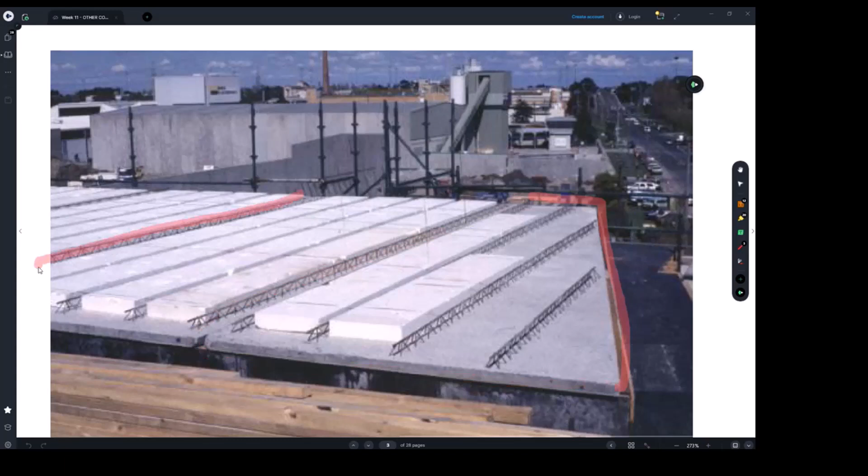Now, can someone tell me which system we had before over the past weeks that is kind of similar to what we're talking about here? Any thoughts? Excellent, yes - hollow core. Hollow core was kind of the same thing, but with hollow core, the reinforcement was fully inside the hollow core units, which come from the factory.

And then we had just the top screed - about 100 mil or 80 mil screed on top of the hollow core slabs. As I said, that screed on top is also structural because it's got a mesh, it's got some steel we put in. So hollow core was a combined flooring system in terms of construction on site and precast.

Now, one of the key advantages is you don't need propping, you don't need any formwork below, because you have ready-to-construct floors below the slab. So as soon as you put the precast part on top, other tradies can actually go under and start doing whatever they have to do - services, whatever other construction requirements. That's the key advantage - it's fast, it saves time, and it can go up to specific spans. So that's the first system.

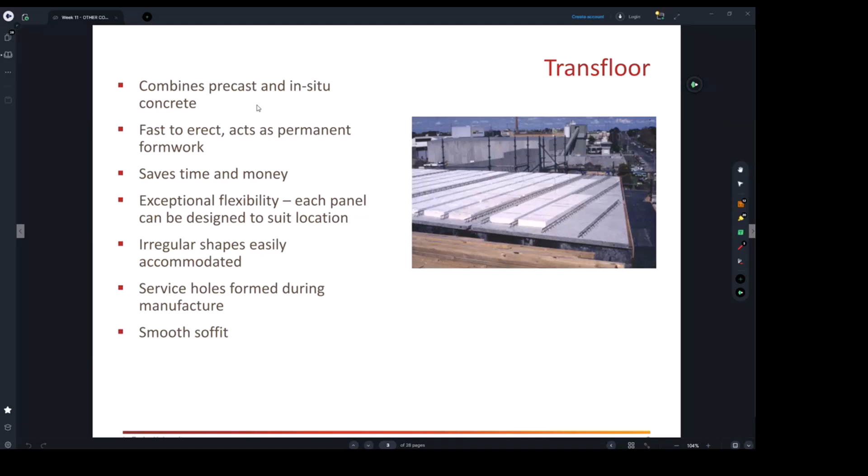As it says here at the very start, this is combined precast and in-situ concrete, fast to erect, and it acts as permanent formwork. That's the key point. You need to know that system, know the key advantages, and compare it with other systems we've been talking about. I'm sure you know about hollow core as well.

It saves time and money - this is talking about the same thing. If you save time, it's fast to erect. There is flexibility in construction, but the design engineer will, as you can see here, form the precast section to the shapes required. It does not always need to be rectangular shapes.

If you remember the hollow cores, they come in strips, like what you did in assignment 2, and what I've seen some groups doing - well done. When you put the hollow cores, they come in about 1.2 meter, 1.5 meter strips. If you had a void inside your building, you have to put supporting beams around the void. Now with this transfloor, the voids can be allowed for in the factory - you don't need to worry about it. So it's got flexibility in construction.

Yes, we can construct irregular shapes easily, because you can see here we've got this semi-triangular shape, semi-rectangular shape. Services holes can be formed during manufacturing. It's unlike precast hollow cores, where when you construct them, you have to frame up the trimmer beams.

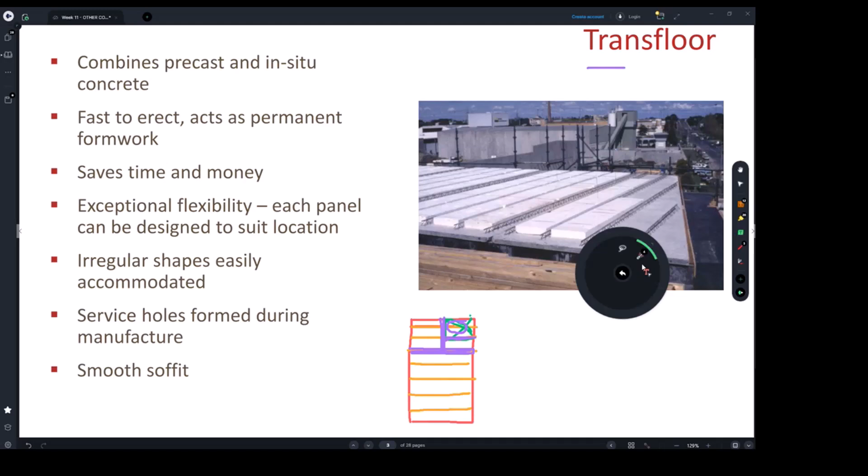Just going back to where - yeah, here we go. For the soffit it will be really smooth. So as we know, the soffit, the lower side of the slab, from underneath of the slab, it's typically really smooth. And hollow core will be quite rough. So that's something the architect needs to allow for.

Also in construction, you've got to know if it's hollow core, we're going to need to put plastering at the ceiling level for the floor below to hide such things. But the transfloor, it's going to be smooth - it's kind of ready for service. It may just need to be painted and all good.

In terms of its construction elements, now you can see this kind of truss system, right? The triangular lattice truss system. It is the key reinforcement element inside it. It's already embedded and placed into the transfloors while it's built in the factory, and it will come like this to the site. So the key reinforcement element for those systems are the truss systems.

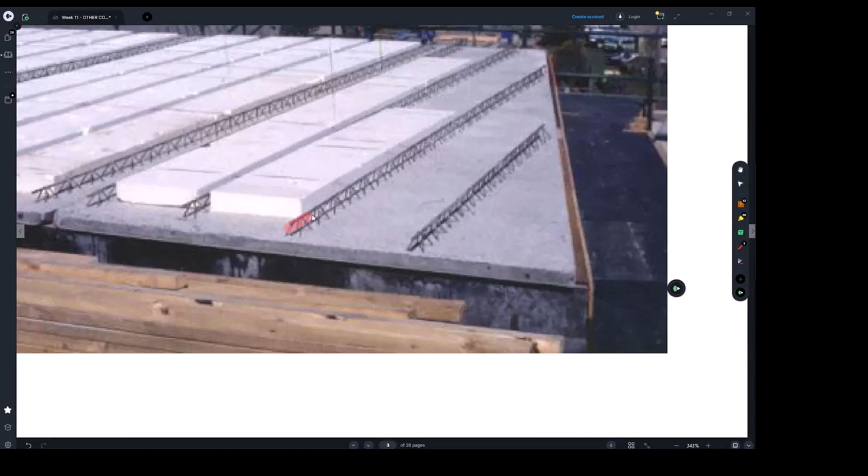The triangular girder truss systems are built, and the size of the bars - these are the diagonals within the triangular truss system - will typically be sized by the engineers, whether N16 bars or 20 or 12. They will be pre-placed in the factory within the precast section, as also shown to you here. You can see these are the truss girders, partially constructed inside this 200 millimeter thick slab, or more or less depending on the design.

So the first elements we have here are the reinforcement. There are also other secondary reinforcements running this way to cope with shrinkage and the small spans. The way these slabs really work, the main girders supporting the span are these strips where the trusses form part of the strip. Then in between, the slab runs between the two strips, with reinforcement within the slab, as we're going to see in the next details as well.

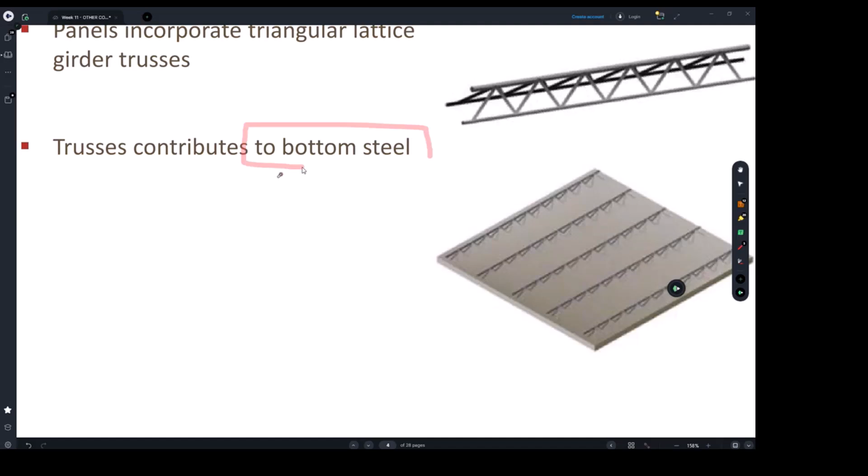So these bottom bars of the truss - as you can see, there's one bar at the top and two bottom bars. They're going to act as the bottom steel for the slab, for the transfloor slab.

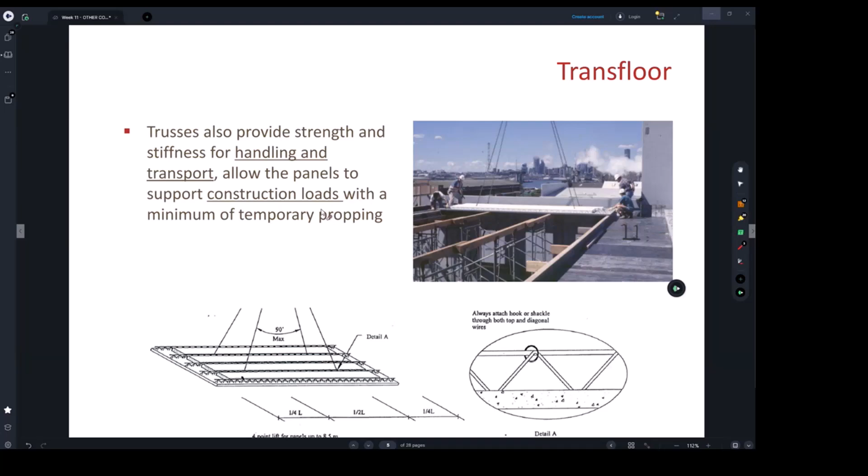Remember there is also a bar submerged inside the concrete already, like this. So as you lift up or crane up the transfloor slabs, the truss will be taking away the load from the concrete. So the truss has a temporary function, which is to carry the precast slab.

So the actions will be kind of different. While you carry the transfloors, the truss will be under negative bending action, which will be transferred to forces inside the trusses. Then the permanent positioning of the transfloors will end up imposing positive bending. So if you lift this truss, the bending moment diagram will look something like this, but things will be different when you actually place the transfloors in their permanent location.

Now someone looking at this will say, but we do have propping lines. You can see there are propping lines here. That's correct. That's something similar to the Bondek - remember the Bondek sheets, they can be without props, with one line of prop, with two lines of props. Same thing with transfloors.

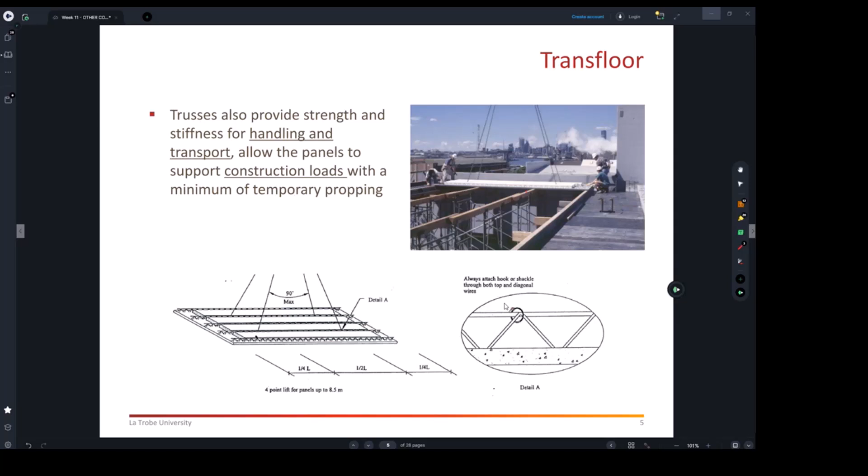So basically from the slides, we can understand that the triangular trusses we have in the system act as a framing component to support and crane the precast sections of the Transfloors. Once it's in the final position, they work with the slab to resist the permanent loads. Now this is not the final - you're going to see next what we do after you place them.

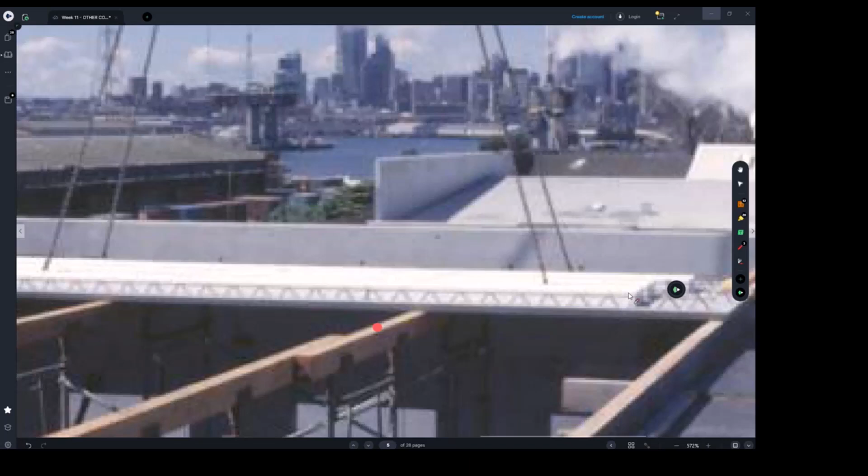After they place the transfloors, sometimes you see those white parts - they are foams, polystyrene foams. They're going to create voids within the final slab. In the next slides, here we go, the green shaded area - it is a void. That's where you see the white polystyrene foam. It is there to create a void.

What was the reason? Can someone suggest why you think we're putting the polystyrene foam in? What's the main purpose for that, you would say? Why do we have polystyrene foam in there? Someone suggests acting as a suspension.

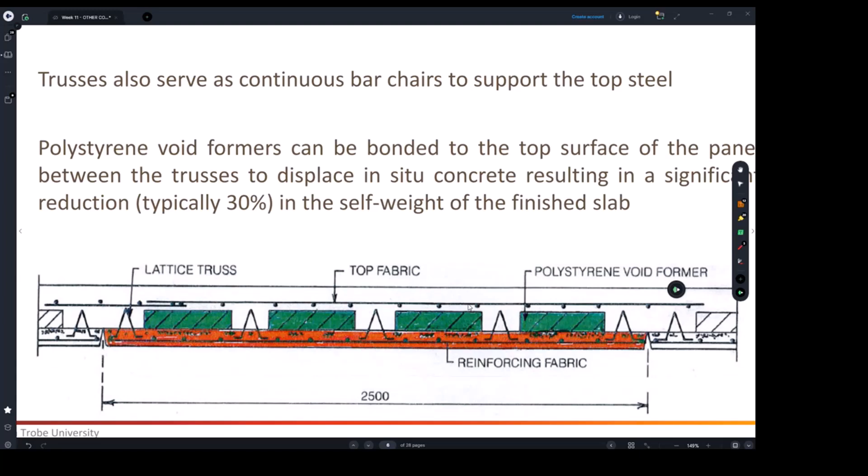So you can see the cross section of the transfloor, it's what we're seeing here. This is the full thickness of the slab - this is the full, final thickness. Now the precast section is basically going to be this lower part. Let me clarify this: the 2.5 meters is the width of one transfloor panel.

So you remember what was the case for the metal sheet decking in the composite slab last week? How wide was the section to put in one go?

You remember that number, that width? What was the width for that? 590 mm. Say that again. 590 mm. Yes, so about 600 millimeter width.

Today, the width of the Transfloor can be up to 2.5 meters. Now, the red color is the precast section, which will come to us from the factory. And on top of it, we're going to have this triangular lattice submerged.

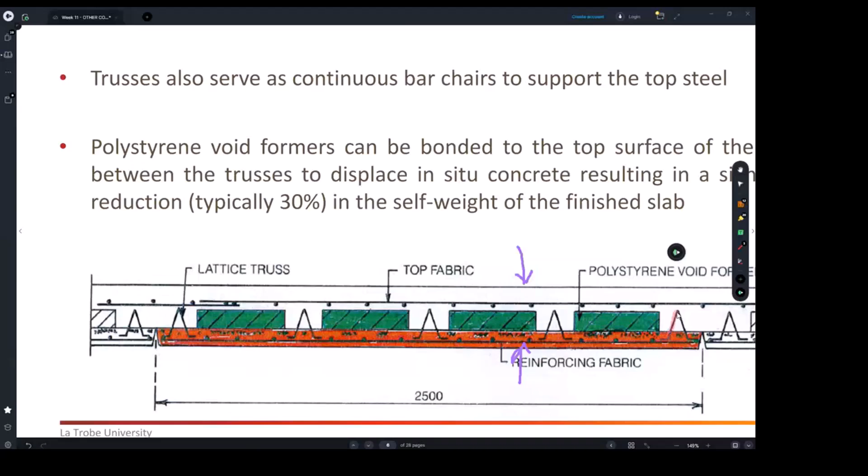Within the precast section, there is a mesh. A mesh of steel, you can see the steel running in this direction, and also the steel running out of the page. So it's like a mesh, which I showed you several times before. You can see the lattice trusses are also partially submerged.

Excellent, yeah, that's right - to reduce the weight of the slab and the steel quantity. So basically it is the weight. We're creating voids. It's something similar to the hollow core.

Hollow core, they've got circular kind of voids. Why are we doing this? We're doing it to reduce the dead weight. The dead weight is usually the heaviest component in the structure.

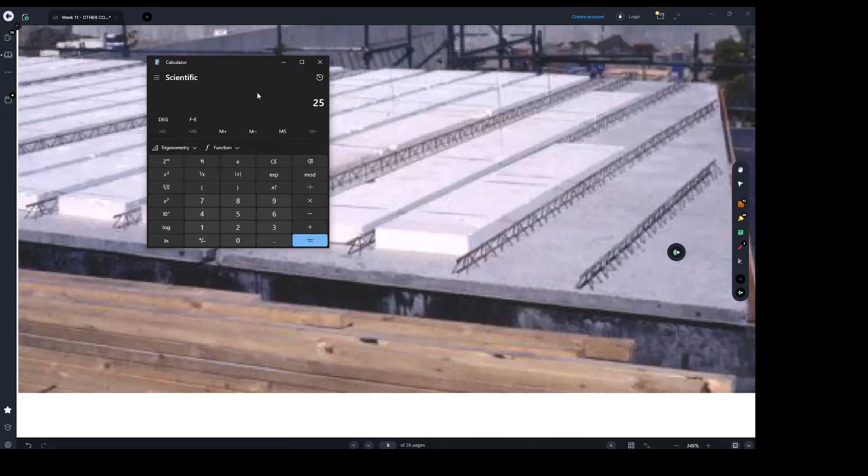The density of concrete is 25 kilonewton per meter cube. So 25 kilonewton multiplied by, say, a 200 thick solid slab, multiply by 0.2 in meters, gives us 5 kPa. 5 kPa is actually 500 kilograms per meter square. That's just coming from dead weight.

Now imagine that usually the residential load on a slab is only 1.5 kPa, or 150 kilograms per meter square. And you can see the 200 thick slab can span only 5 meters or 4.5 meters by its own.

It's 500 kilograms. That's why engineers and construction ideas always come up with systems that allow you to go for larger spans. You saw your hollow core for your assignment went up to 14 or 12 meters or even more. If you want to use solid concrete, you're going to have 300 thick, but remember, there is a lot of dead weight there.

So you can see there's always polystyrene suggested in different ways that will basically help you create voids, and voids eventually reduce the dead weight of your slab. Right, so let's go back to our section and take it further. That's the section I was talking about here.

The colored parts, which is the red part here, as well as the void, as well as the trusses which are submerged or embedded into your precast section, they will be craned on site. Then later on, when everything is positioned, the top bars will be placed.

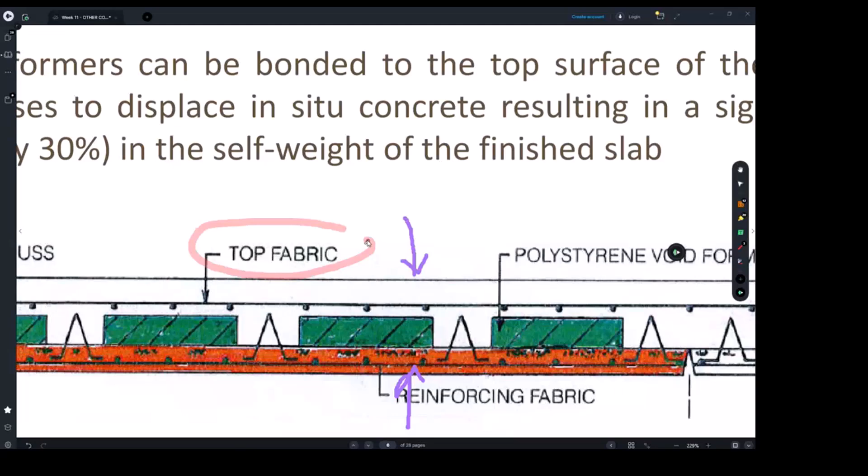So this is another mesh, which is to do with the top bar. Then you're going to hear we're lapping the mesh. We have to lap it. In the engineering drawings it tells you how much lap we need between two sections. And then you will be pouring this whole slab all together.

Now, how thick is the slab? It varies depending on the span. It's like hollow core - hollow core can start with about 250 thick hollow core slab, and it can end with 400 thick concrete slab, depending on the span and the load it wants to take.

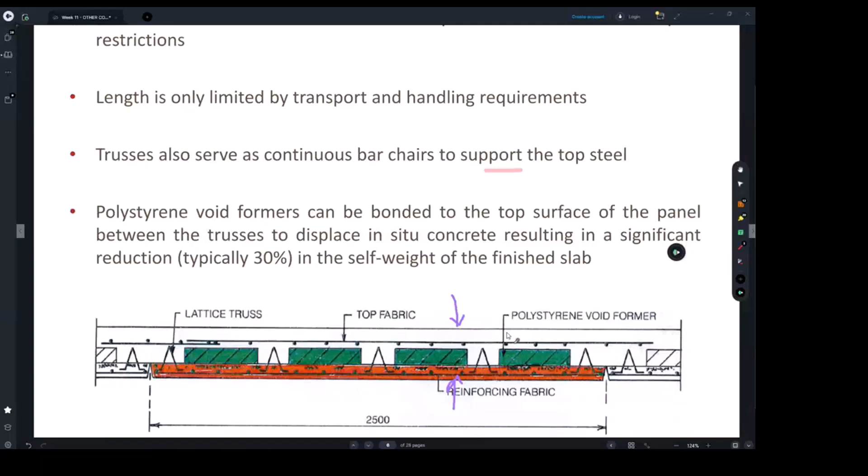Same thing, I go through the same thing. So there are some details good to know about. You see the trusses will also serve as chairs to support the mesh. Usually these lattice bars or triangular truss bars can also support as chairs for the top reinforcement.

So the length and the size of the Transfloor is also a function of transportation. Generally, 12-meter trucks can be ordered reasonably with adequate economic measures, but if you want to go longer, cost will be high.

This is the standard width, as I said. The standard width of the Transfloor is 2.5 meters, limited by normal transport restrictions. Otherwise, you can go with a widened vehicle, but that needs more arrangement. Sometimes when you drive, you see two cars moving alongside a truck because it's wider than this. So it depends on where you're building it.

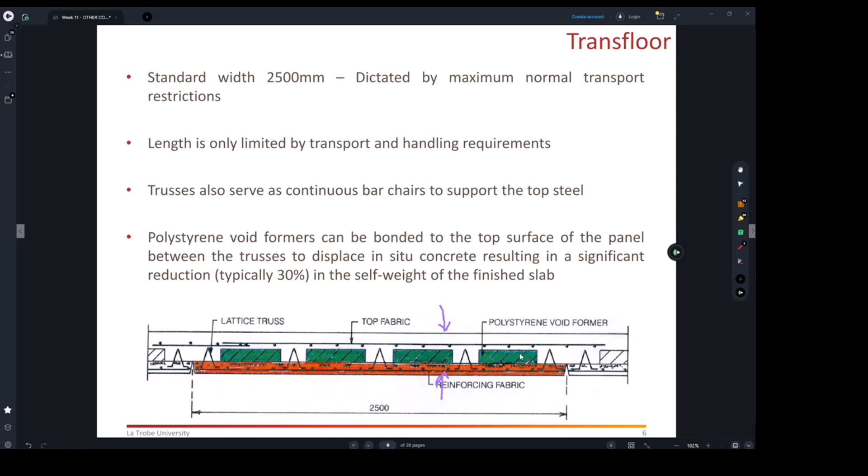We talked about the polystyrene void formers, which typically can take away 30% of the dead weight. So imagine if this was a 400 thick slab overall and you did not allow for the polystyrene, the dead load will be increased by 30% if you did not allow for a polystyrene to be there. And nobody will do that.

This is just another section from the suppliers. So basically what you need to know from these notes is the system, and all these kinds of features. These are the questions we like to ask you, the features - they are all what I've discussed with you. The components - I think all of you will know the components.

You've got the precast section with its own reinforcement, the trusses, the triangular girder trusses, the polystyrene, and then the in-situ component, which is poured on top of the precast section. So as you study these things, always think about the components of the system and the considerations you need - one of them is whether you need a single propping line, no propping line, or multiple propping lines.

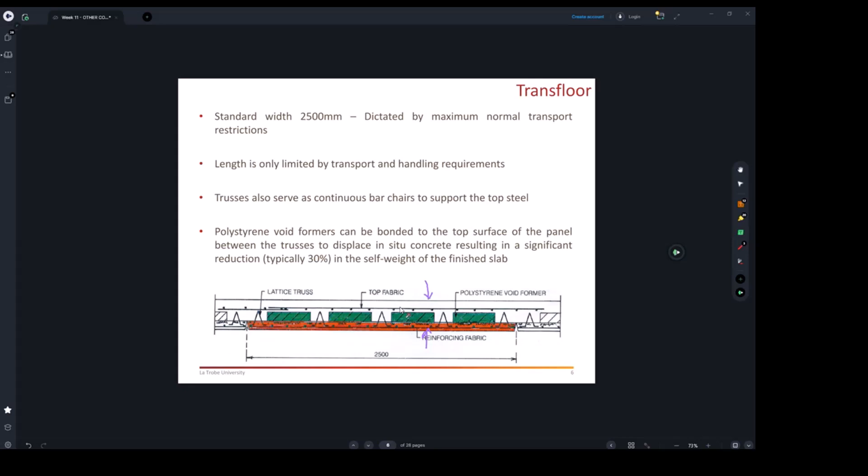These three systems we're covering today, read them alongside the other systems we talked about, like composite systems, the post-tension systems, and the pre-stress systems - we had a couple of pre-stress systems. They kind of talk about the same features and the same ideas. So my point is, when you start reading for this topic, try to read it alongside the other topics. Don't read them separately.

This is again from the supplier, from one of the suppliers who manufacture, erect and construct. Nobody knows - maybe one of you is going to be managing the construction of an entire building, or you will be working for a manufacturer for one of those elements. Nobody knows what you're going to be doing, so they show you how you can connect this transfloor system.

The transfloor system I'm talking to you about this week is here. They show you how this can be forming a slab - see here, they are forming a slab, which we've seen. And here as well, it is forming a band beam. So you can use this system to actually build a band beam and to build a slab.

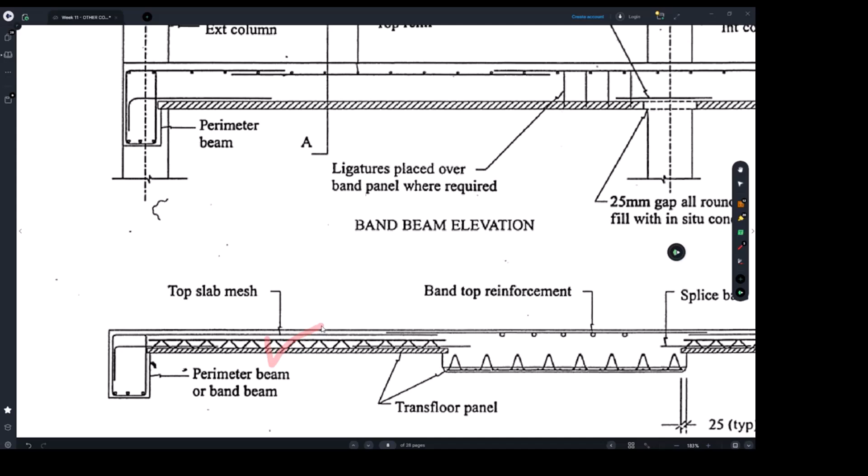But with the band beam here, we are cutting across the band beam, and here we are cutting on the longitudinal direction of the band beam, right? And there are some basic reinforcement detailing - there are going to be some special bars lapped between the transfloor slab and the other supporting elements.

Okay, same technique - these can be built together. You can see here, this is a picture just showing the band beam preparation, and this side is the slab, right? So it depends. I can see that the band beam here is just a solid band beam, because this is just the formwork - so this is just the band beam without the transfloor, and the transfloor will be supported on the band beam.

But the band beams as well, if possible, can be done by using the transfloor as per this image here. The suggestion by the manufacturer is that this band beam, if you want, you can build it with the transfloor system. This side here just shows you an edge beam, which is the concrete edge beam.

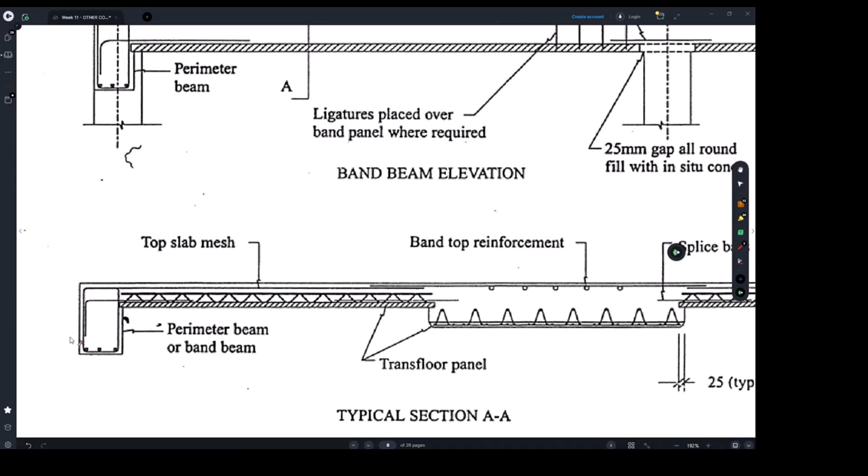So they can build it - they can pour all the concrete in one go, you just need to prepare all the reinforcement. Here you're going to have the formwork, the boxing out for the beam, and everything will be propped adequately. So what I'm showing you is how you prepare the formwork for a concrete beam - this formwork will be solid enough to support your transfloor. Remember that the transfloor will have its own propping lines as required.

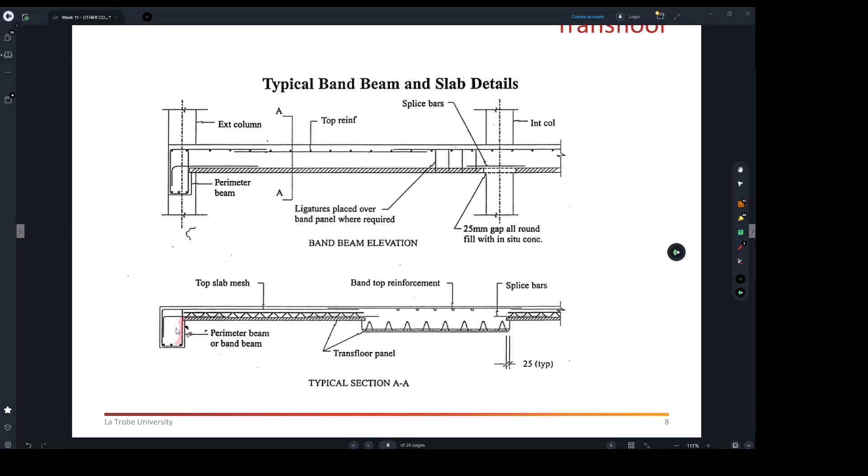Same thing for the band beam - it can either be formed as a solid band beam, or you may think about using the transfloor if it's adequate to do such a job, and then you may need a propping line. Then you can pour the concrete all together on top of the precast section, and it's also going to be poured for the beam as well.

So this one, can someone tell me what they expect, what they're seeing here, the connection between which structural element? This is what we all know, that this is just the transfloor slabs. Can someone tell me what they're allowing for here?

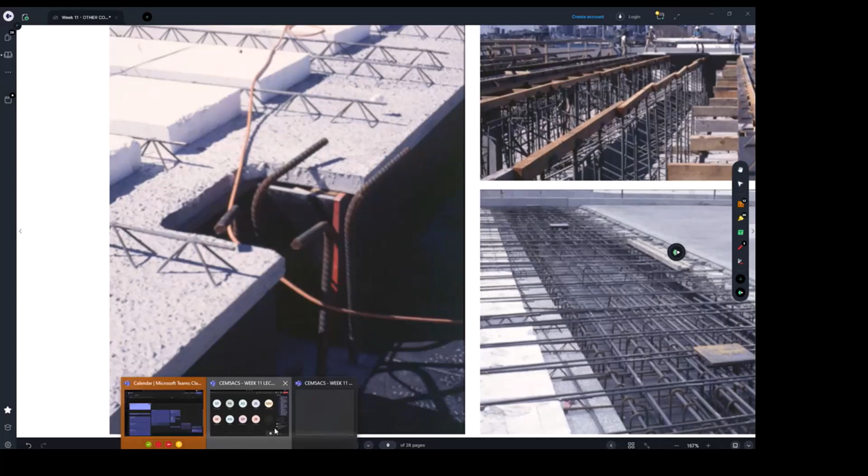There is a beam here. You can see there is a room. That's where they're going to be pouring concrete, as they call the upper part of the slab, the in-situ section of the transfloor system. They're going to be filling as well the beam, and obviously the column part will be poured as well. And it looks to me that this is actually the final floor level, because you can see the bars are cogged, they're not continued upwards.

Right. So let's talk to that. This may be again a picture you see in a final exam and tell you, can you please annotate the structural components that you are seeing in this image? That's basically part of a question you may see.

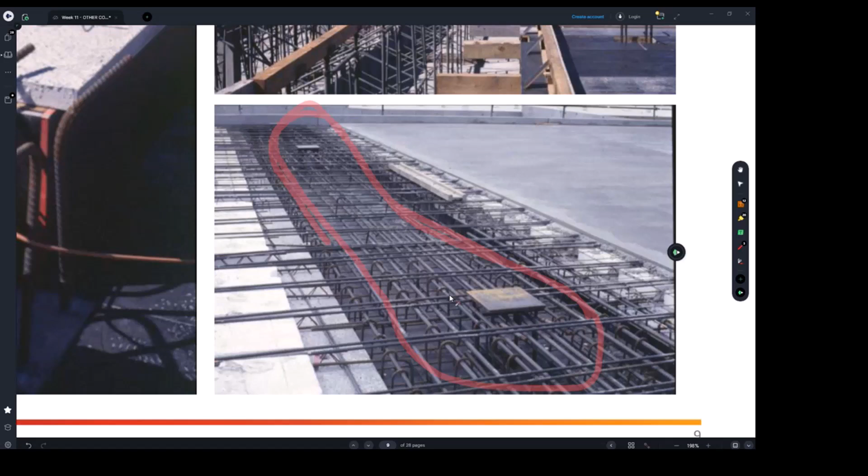So can someone tell me what's this I'm going over? What's this? Band beam. This is a band beam. That's right, and it is basically an in situ band beam, right? And we studied this, and I expect students to know it. What was this system here?

So in general, this is basically, remember, as we always do with you, we're going to be really specific in the questions. We tell you list, for example, 5 components. So band beam is number 1. Now someone can come here and say, what's this I'm highlighting here? It's the transfloor system we talked about today. That's the transfloor system, which is supported on the band beam.

That's another component. Then you can talk about the elements of your transfloor system. This is a polystyrene formwork with the voids. This is the polystyrene elements. Yeah. And what's this here?

What was this part? The truss. The Lattice. Triangular lattice truss. That's right.

Okay. Now, whatever we covered for you, we will expect you to answer. There are things I will talk to you about, but we don't. We won't, maybe if this element was not something we studied, we focused on during our week, you won't be, I won't be waiting for the students to answer.

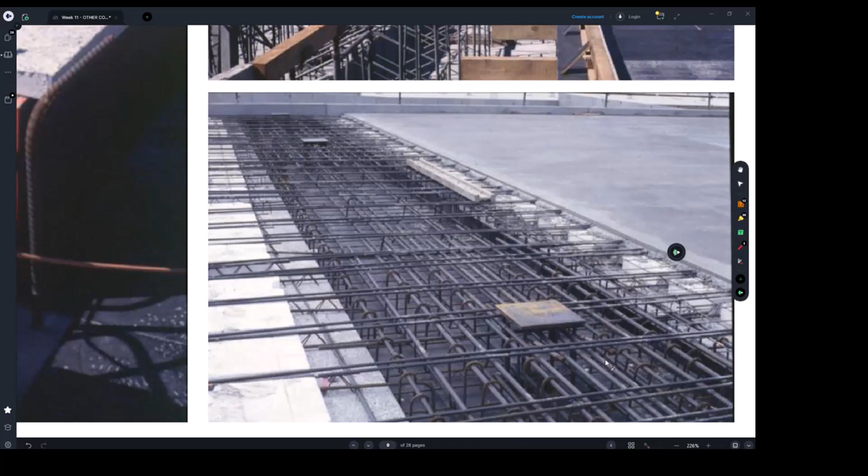For example, someone is they may ask me, what's this? Can someone suggest what's actually this? It is something you studied, but you did not directly study. It was for something else. But anyway, I don't expect students in a final exam, all of them to answer this, so there will be no,

that's why if there are effectively 6 elements in this image, I would expect students to answer 4. But if students answered it, that will be clear for them. So I just want to see how students' knowledge is at. Anyone knows what they think? What's this actually?

Yes, yeah, plates. Yeah, they are the cast-in plates. You remember what we studied in the precast panels? We have the cast-in plates with U-bars in the back. That's same. But here they wanted it, maybe they're gonna weld, this may be the last floor, and they wanted to weld the column on top for a canopy or whatever.

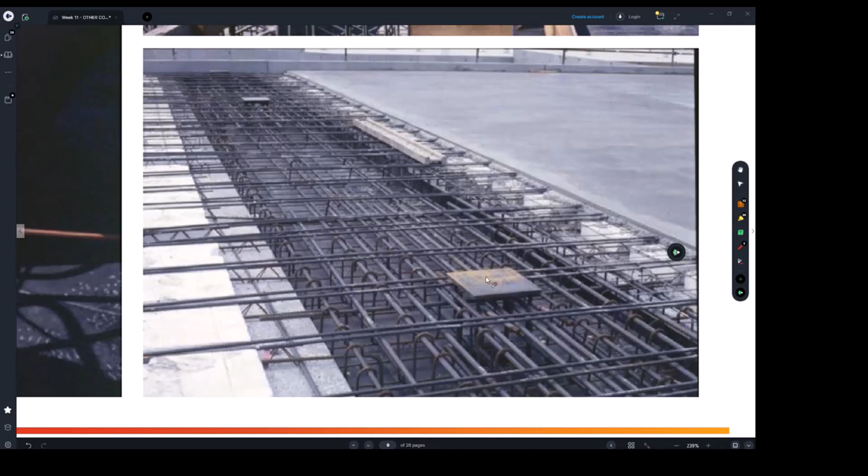You know, like what you see in a car parks or something. So maybe they're gonna be having a column. After they pour everything, they're gonna have a piece of column and then they're gonna weld it on this plate. So this is simply, it's a precast panel, something similar to what we used, and what you're gonna need to work, what you're gonna need to show me this week.

Again, I think people will need some support with their last question, the precast panels. I will talk about next week how you're gonna be examined about it. And there are some groups, they showed me what they're doing, but they didn't show me enough about the last question.

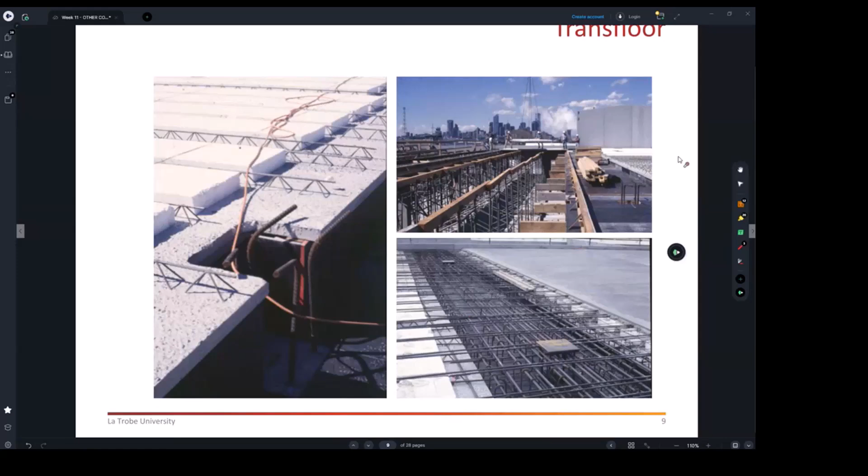So basically here what we're seeing is just the formwork which I showed you. This should be very solid formwork, because it really needs to be solid enough, since it's going to be carrying the edge of the Transfloor slabs. Remember, the Transfloor slabs have two lines of supports here, and they're going to be supporting the Transfloor slabs.

Any questions you would like me to answer, or any detail you see? If you're going to be asked about something, you'll be asked from images similar to this, and we just want you to tell us, yes, I know this system. That's the credit we want you to have from the subject.

So that's one type of slab, the Transfloor slab. We're done with it. Ultra floor - it is basically something which consists of things we studied before.

So this is another flooring system locally used. You may end up in a company which doesn't use these types, but however, if your company is involved in renovating an existing building or adjusting it, most of the buildings you see in the city are built with this system.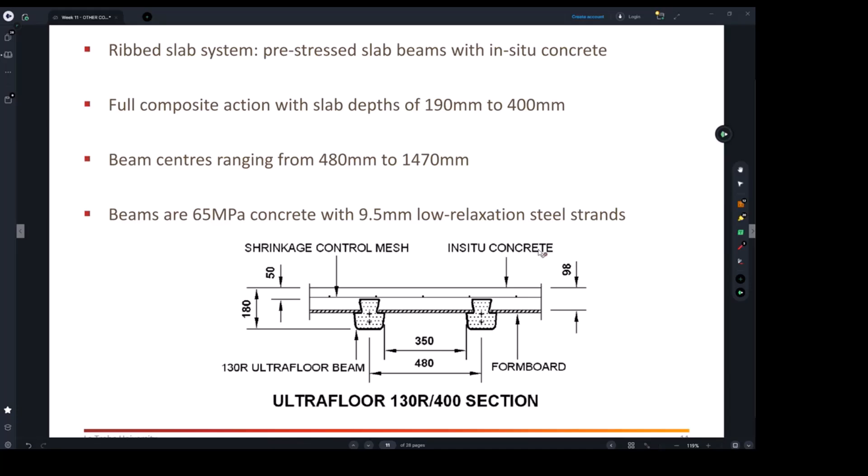So it's still possible you may end up searching for such a system and need to know how it works. Basically, Ultrafloor is another system which is, as we said, pre-stressed beams with in situ concrete. So it's kind of a combined construction type, and it's a ribbed slab system, because they have these kind of elements.

If you're going to start making renovation works on existing buildings, like what they did about 8 years ago for the central station in the CBD next to RMIT University - they had a lot of upgrades there, and the existing floor was all the ribbed floor system. So to work with such systems, you have to know how they are framed in order to adjust them.

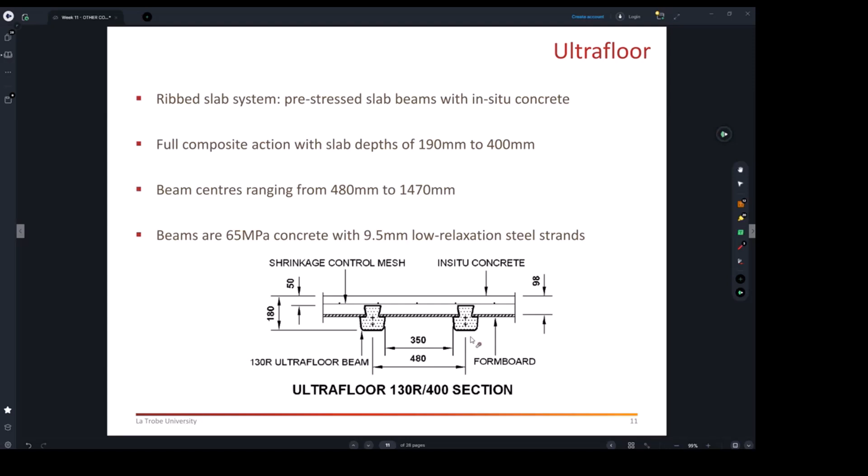So back to the system, part of it, this composite, is precast. This precast element is actually pre-stressed. That's why it can take much larger spans, and most likely you need zero propping systems here, because imagine you have precast, pre-stressed elements with good high capacity, higher than the transfloor slabs. It is a ribbed floor system, ribbed because you're always going to see these kind of ribs from the soffit side or from below the slab. These ribbed beams are pre-stressed, and we all know what pre-stressed is, we talked about this a few weeks ago.

Then there are special sheets. They can be lightweight if the ribs are very close to each other, only about 0.5 meter apart. So in between them, you can use very lightweight material, not steel - it can be plyboard or any product that can temporarily sustain or permanently prop the concrete, but we're not using it as part of the structural system. It's just to support the wet concrete until it gets hard.

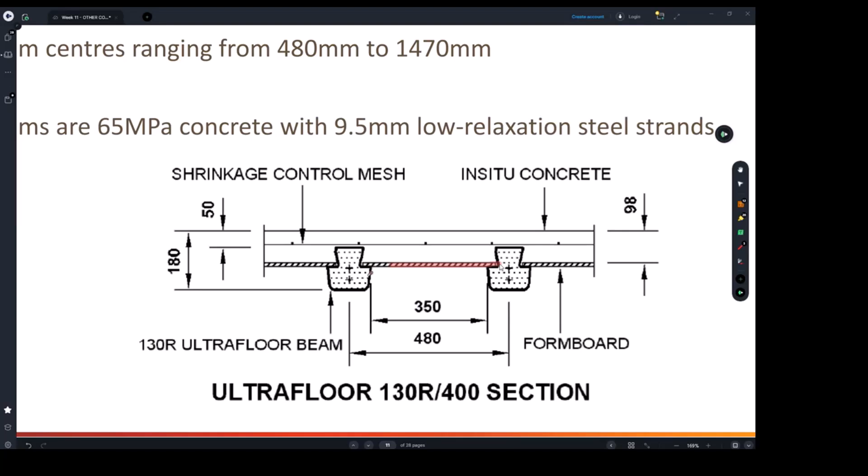The other advantage of these sheets is it's actually more useful to have it cementitious or plaster-based material, because it can help you with the fire rating and fire resistance. That's one of the key advantages - you need something to fire rate the slab. So if you use metal sheets, you get less fire resistance.

But the metal sheets have capacity to go for longer spans. If you want this to be a meter or 1.2 meters, as we're going to see next, you will end up having a metal sheet, something similar to what we talked about in the composite slabs last week. The key advantage here is for the slab to be really thin - about 100 mil thick slab. And the overall depth with the ribbing of the pre-stressed precast beams is going to be 180 thick.

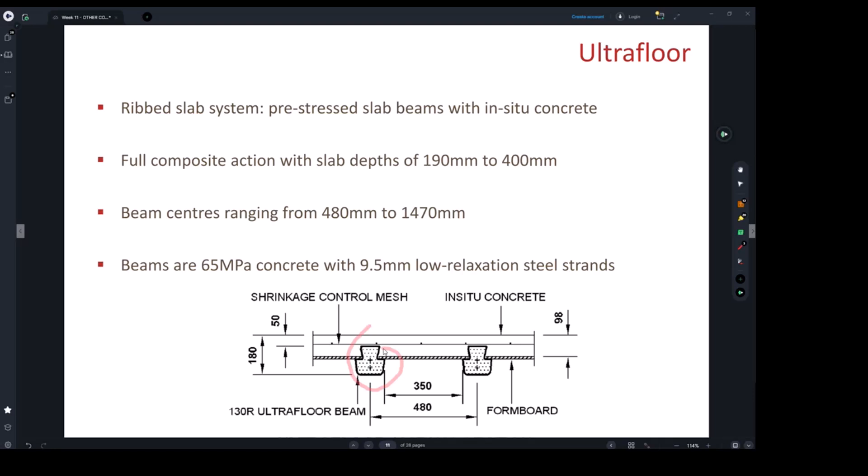There are different sizes by the suppliers, different thicknesses. It depends on the load - if you want to carry an office building, it's different than a shopping center, and that's different than residential. Beam centers - we're talking about the ribs - range from 0.48, which is the case here, up to 1.5 meters. Once we go to such long spans, we'll end up using heavy duty sheets, which can be metal or steel.

So the pre-stressed beams are quite strong, 65 MPa concrete with 9.5 low relaxation steel strands. This is special steel strand, smaller than the 12.7 we used before, which you have documented and are working on in your second assignment. You're all going to need to show me nicely, adequately drafted floor plans for your precast slabs and floors in assessment 2. I'd expect most of you have already used the 12.7 strands - this one has smaller strands, the 9.5 diameter, but it's only needed for these special type of rib beams.

As I said, they come in different types from the supplier - you've got the R beams, M beams, and C beams. Definitely these go with more strands, more heavier to take loads, and the sizes are given to us. You do not need to memorize those - I just want you to know the system in total, how it works.

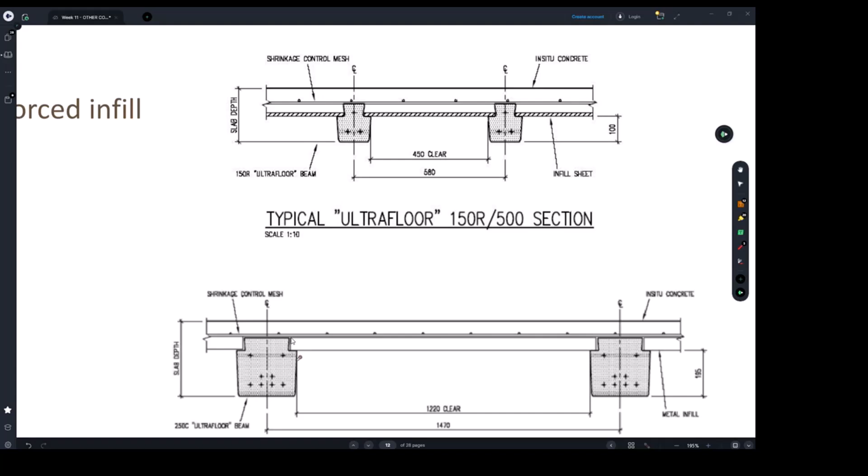But if you needed to fire rate this floor for whatever reason - maybe there's a car park here and residential floors above - you need to allow for fire rating, so this may need to be sprayed. So I think all of you will be forced to use the metal deck if the spans were really long. You cannot always use the cementitious based permanent formwork, because it's got limited capacity, up to 600 spacing. Every few years you get more products that challenge others, but it's up to whatever is available.

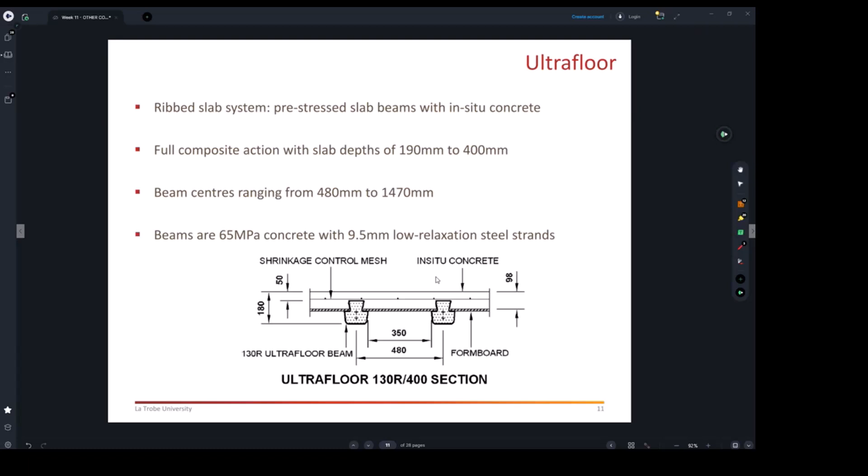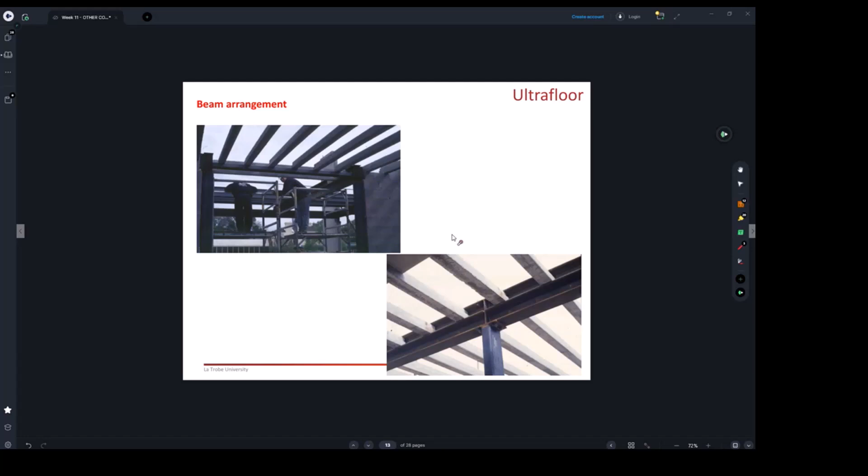A lot of 40, 30 year old buildings in the city are built with such systems, and if modifications are required, you definitely need to know what systems are being used there.

You can see here, this is just the formwork, with fiber cement. These gray products are ready to take the concrete - you just need to place the reinforcement on top, and the cementitious based sheets will be taking the concrete weight. That's it, the concrete should be ready.

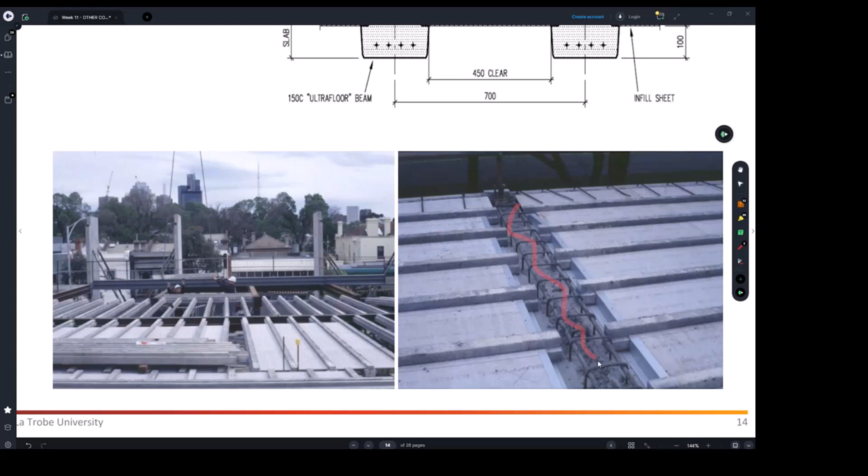This is the main concrete beam - if you're on top of the subject, this is similar to the pile caps we've seen in retention systems. The pile cap was partially built to allow placing the floor on top, like what you'll be thinking about for your second assessment. Same thing here - the concrete beams need to be partially built keeping the surfaces very rough and keeping the shear ligatures, which take shear partially, extended. So when you pour the in-situ part of the ultra floor, it's all poured together and everything engages together.

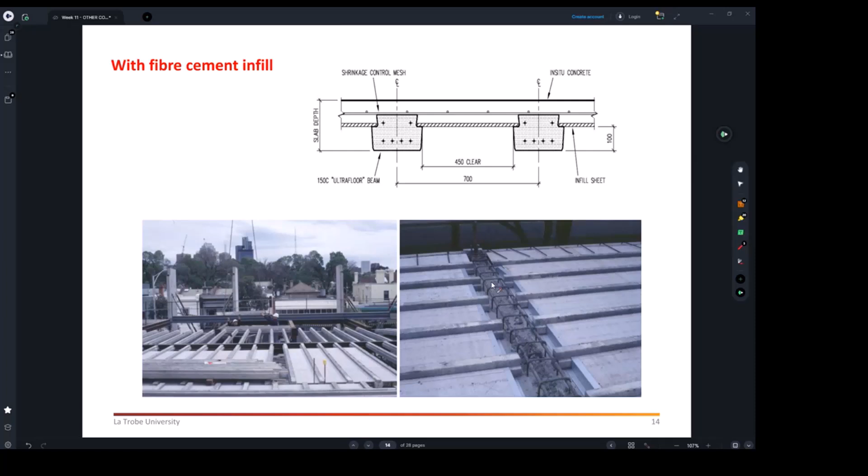So your system is built. Again, for questions - what knowledge you need to build from these topics is to make sure you read the notes. It's not really heavy, read the notes carefully, understand the pictures. If something doesn't make sense, that's where you can come to me and we discuss it.

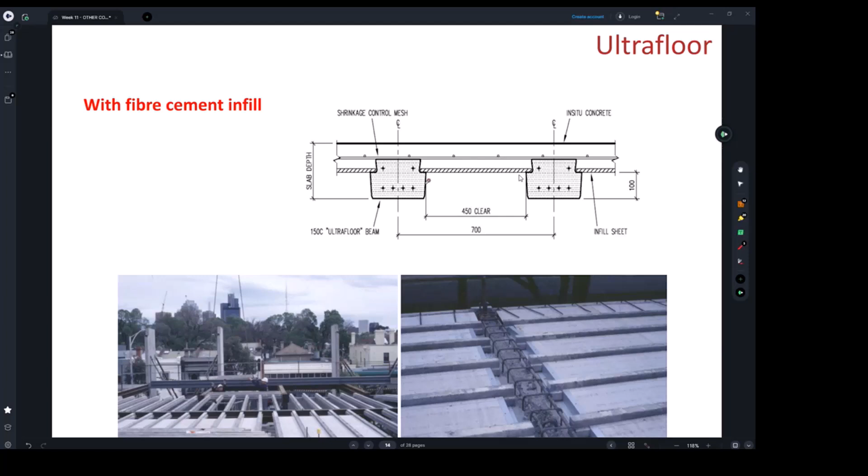If the spacing between your ribs gets really long, more than 1.2 or even typically 1 meter span, and there are no cement-based sheets to take such loads, the suppliers for these sheets will give you their maximum capacity in their own tables. They'll tell you if your span is 700 millimeter and the maximum concrete thickness above it is 150 thick, you can use this product - if you go higher, you can't. Same thing, similar to what you experienced doing for the composite slabs last week.

The metal deck infill, you're going to be using something similar to what was used in the past, where they had different profiling for their metal sheets. But nowadays, most of what you see is the formwork I shared with you last week, coming from one of the main suppliers, Lysaght company. They've got very well used metal sheets.

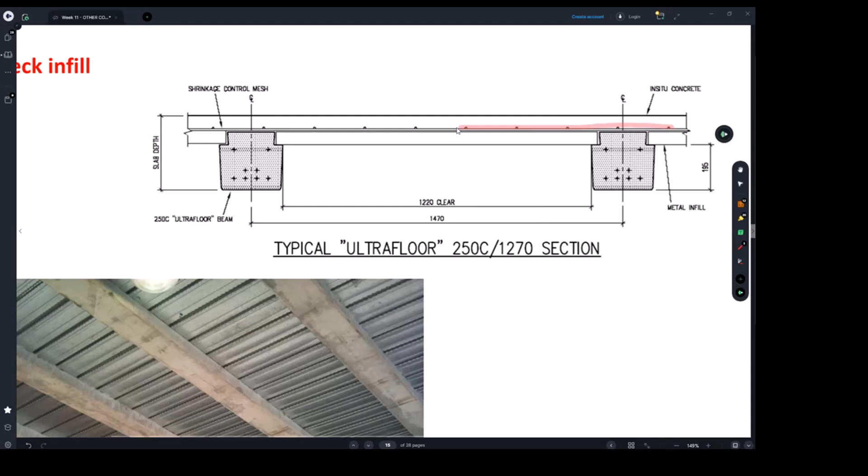If you go within 1 meter plus spacing, you can place your metal sheets and then place your mesh or reinforcement, which is mostly for shrinkage control as well. Then you're going to pour your concrete slab, and that's all about it.

But as I said, fire rating here will be missed. If it was required, other arrangements have to be done, whether it needs to be sprayed. Like students in Bendigo, they have the engineering building they study in. It was kind of a new building, built as composite slabs, and most or all of the metal decks from below were actually sprayed, and it was painted with black color to look nice.

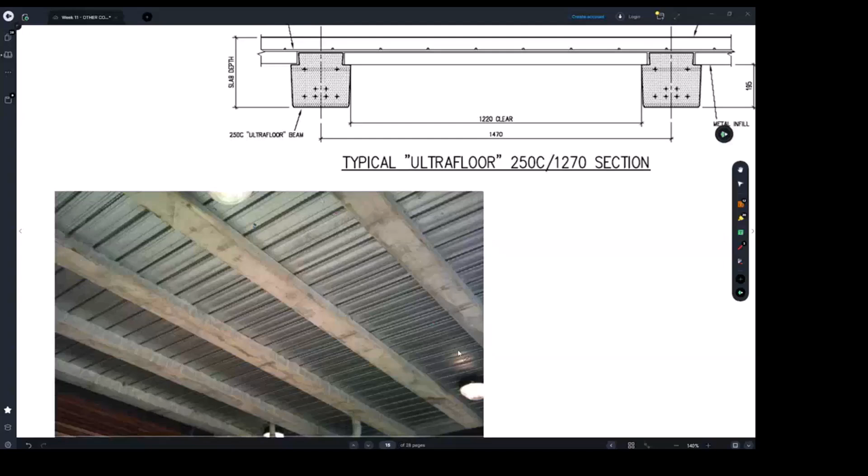As I said, the suppliers for such systems will have their own friendly tables to use. This table is talking about the section properties, which is to do with the engineers, because they need to find capacity. Construction engineers usually don't size up the sections.

So these are going to be nominated by you. How it works sometimes, if you are the builder deciding on changing floors, the engineer will supply you with these values, with the loads. So they will tell you what the slabs can carry, or the ribs, and then you just need to compare with this document. The engineer will tell you what the ultimate moment capacity is.

If they told you it's 15, then you can actually use the 150C because it's 22, but subject to checking the other capacities. You have to check. Usually the ultimate moment capacity will be higher than the crack control moment.

Now the shear, you have to take it from the engineer. If the engineer said it can resist only the action from the load is going to be 16 or 17, then yes, the 150C is still winning, still okay. So that's what you do. Sometimes the engineers will supply you with loads, or sometimes they're just going to design it for you.

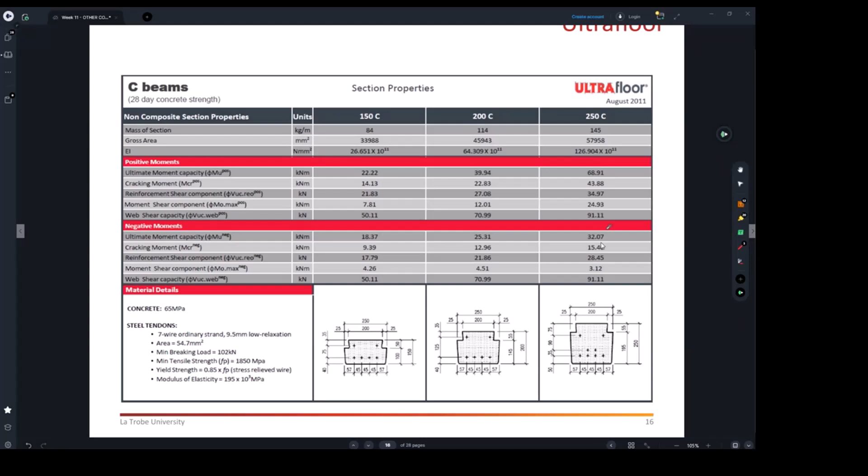As I said, when you study these types, always in your review, try to look at the composite slabs we talked about last week and the hollow cores. Just build that good understanding, comprehensive knowledge about all the systems we visited over the past 11 weeks, including this one, so you don't get confused, to get ready for the final exam.

Make sure you put solid days in now as preparation, after you finish your assessment by the end of this week. Try to put some days aside for this subject to make sure you understand the topics very well. And if you have questions, ask.

And then before the exam, put solid days in to compare the systems together, so you don't get confused, because I do see students mix between the systems. Maybe you're asked about hollow core, they talk about ultrafloor. They ask about ultrafloor, they talk about hollow core.

You don't have significantly too many types, but they are similar. Make sure you understand them, and they should be enough to give you the knowledge you need when you practice in the construction area.

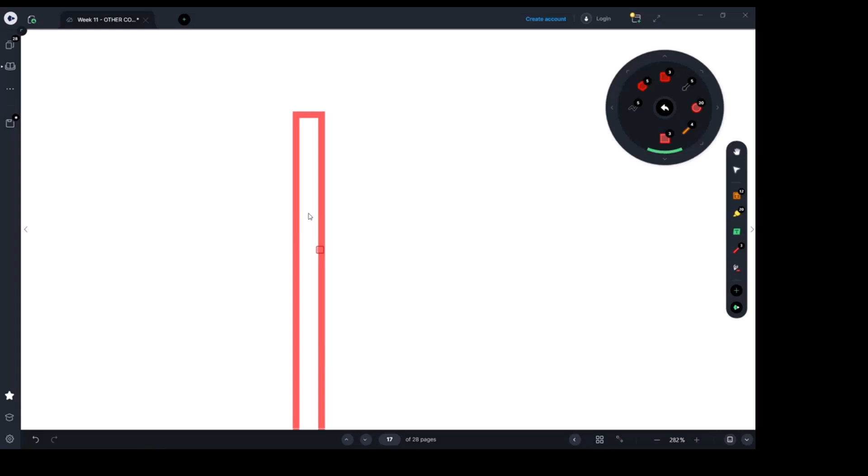Just use the shape to do that. Basically, I'm asking you to think about building it. This is just a wall. How do you think it's built in a 3D view? Yeah, this is just like a 3D kind of view. Any thoughts? How would they build a wall like this?

So yes, we're going to need to put a formwork, which requires, my point is, which requires typically a lot of work. It's just a panel. I can show you images from the net for formwork for a reinforced concrete wall. It's usually, here we go. See what you would experience. This is, let me see if we have a bigger picture. That's the classical way of forming up.

Usually you put the formwork on one side, then the labor are going to come and put. You see these bars, these were the starter bars sticking out from below, whether it's a slab, another wall, or a strip footing, which was that blue color. Then that purple sheet is one side of the formwork, and imagine they're going to need a lot of propping work. Usually they are very sensitive because when you build a wall, you have to build it straight up. You have to be very careful with building it, and there are very robust measurements to do. Then you're going to be propping it like this every 600, 400, depending on the thickness of the wall.

So what I'm trying to say is it's a lot of work. Usually it's not something that can really happen with a simple process or fast erection process. Now that's one thing. Then after you place the reinforcement, before we pour the wall, we're going to place the reinforcement, which would have vertical and horizontal bars like that. You will be placing the other face of the formwork as well, like what I'm just showing you here.

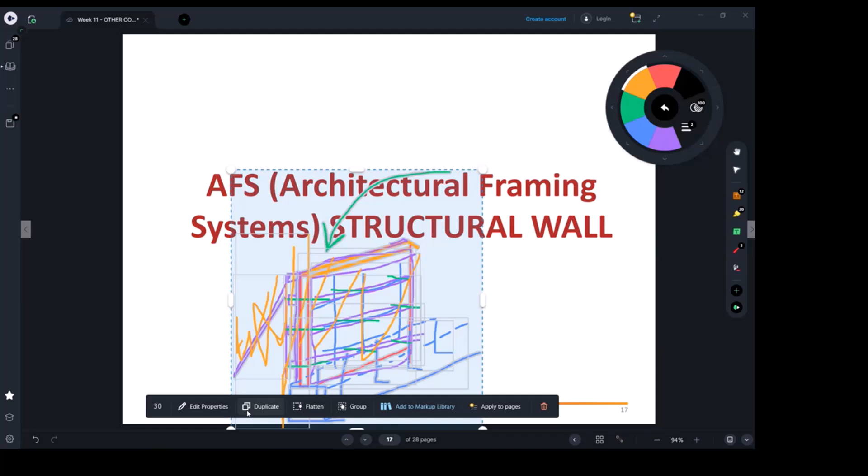Coming back to this technology, it's going to take away all the propping needs. It's fast to erect, you can do it whether you are at the boundary or away from the boundary, you don't need to have those holes. And one of the key advantages is it's going to give you straight away the architectural finish you want, you don't need to render it, it's like ready to paint.

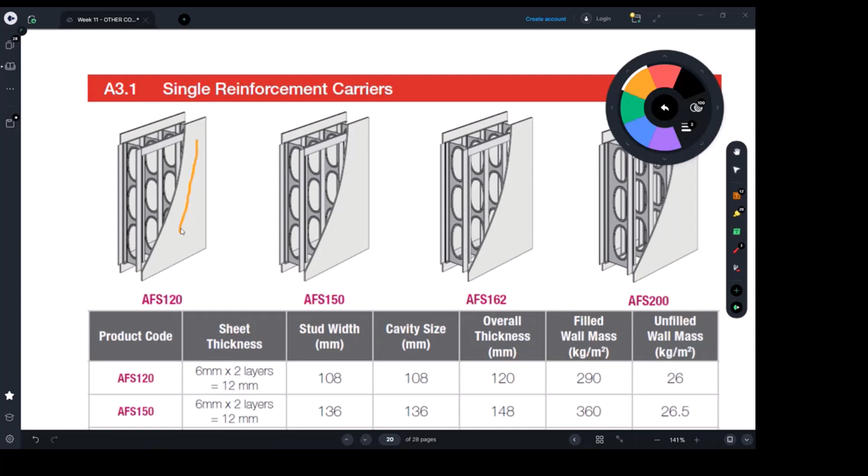These panels, here we go, that's the product I'm talking about, the AFS, the architectural framing systems. They've got this finish here, it's ready to paint. You're going to save all the time in plastering, you're going to save all the time patching the walls and doing all the lockups. It's really ready to paint.

As you can see, the AFS system is typically built in the factory, and that's how they are ordered. They are made out of this element here, a metal-based material, kind of a lattice structure, which takes away that bursting force I was talking about. It's lightweight steel, cold formed, not the heavy-duty steel.

Last week on Wednesday during the workshop in Bendigo, when people were asking me about those composite columns, they are built from heavy-duty steel, thick steel, but this one is lightweight cold formed. The same steel they use to do the purlins and girts, this lightweight cold formed steel is used here, so it's not heavy-duty steel. It's very light, even light enough to carry by 2 people and place it in position.

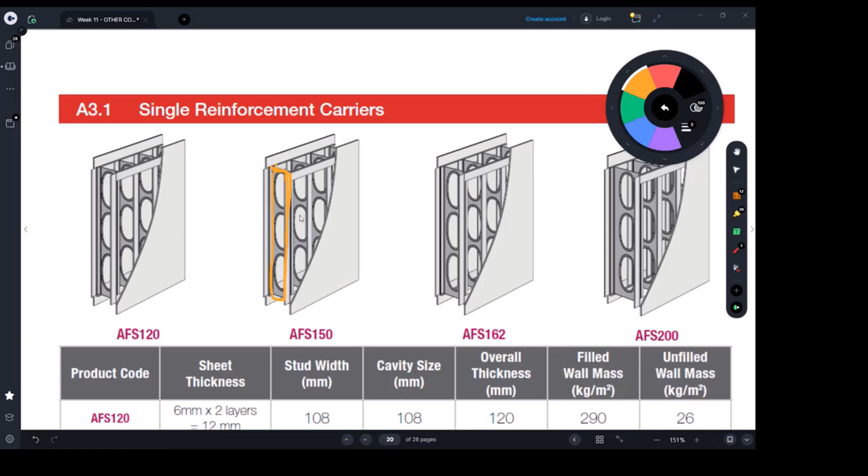You're going to have those every, say, 400 or whatever spacing. Then you can put your reinforcement for the wall within the holes or openings, and you have your vertical reinforcement as per the engineering drawings. When you position them straight up, you put the reinforcement, pour your concrete, vibrate it, and done. Wait for it a few days or a few weeks, whenever you reach concrete strength, your wall is ready, go build the other floor.

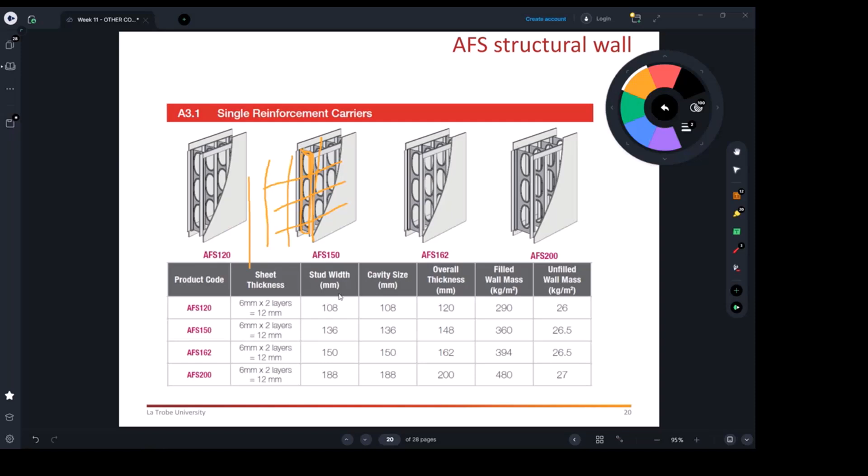So the key thing is you saved the propping needs, and you're going to have ready to service finishes. Now, as I said, this is all coming from the AFS manufacturer. The AFS manufacturers, they come in with different thicknesses, they can be 120 millimeters, 120 millimeter, 150 millimeter, a bit bigger, or up to 200.

Now, the sizes are there, depending on the capacity. The engineer will design the quantity of steel required, which has to be placed within those thicknesses. The benefits, summarized: speed, structural capacity, performance and quality in the final product, ready to paint, and efficiency in overall construction processes. At 200 thick, the height can go up to 4.2 meters, so it's quite decent.

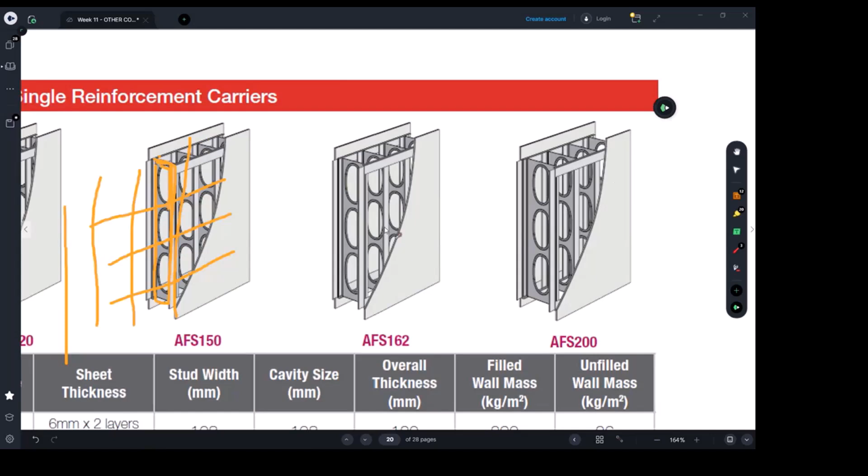Now, one key thing claimed in the engineering reports on these walls: if you design an in-situ concrete wall, you have to use a high quantity of steel to control cracks. As per the standards, we need to control cracks to a very small limit, keeping the crack width up to 0.3 millimeter. That's very small, but since those walls are mostly external, to stop water and humidity getting through, the cracks have to be well controlled.

So what I'm trying to say is there's going to be a lot of steel required for such in-situ concrete walls. However, with these walls, by the standards, we don't need to worry about having excessive crack control reinforcement, because they've got permanent coverage. We're not worried about those cracks being controlled—even if there are cracks, that won't compromise capacity, and we're not worried about durability, because they're fully enclosed by the plaster-based product.

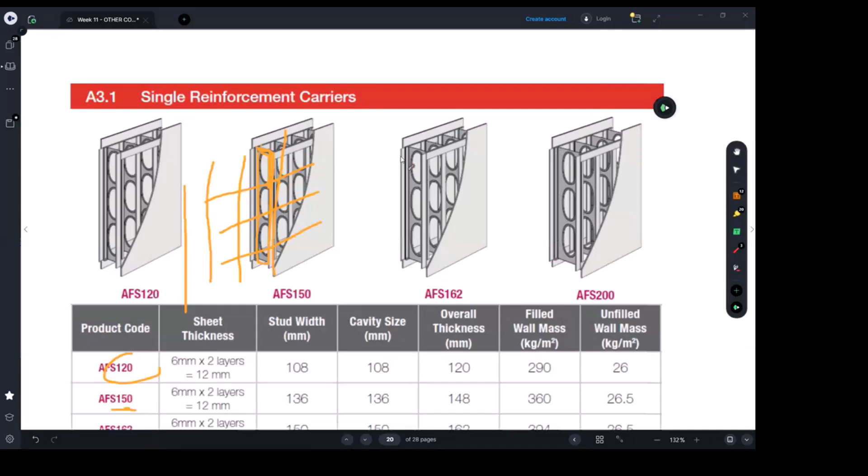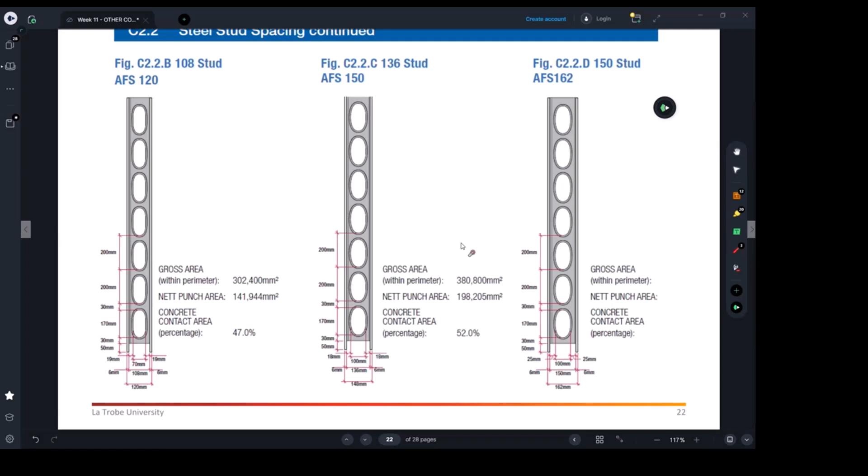Sometimes the engineers—now I'll come to another key use of these walls: they can still be used as retaining walls, and some cementitious-based finishes can guarantee the waterproofing requirements. If you remember what you're showing me in assignment 2 this week, for the basement, in question 6, you need to document putting a waterproofing membrane between the wall and the soil. Now these products kind of guarantee the waterproofing, so you don't need to put any paint or sheeting if that wall was used as a retaining wall in the basement.

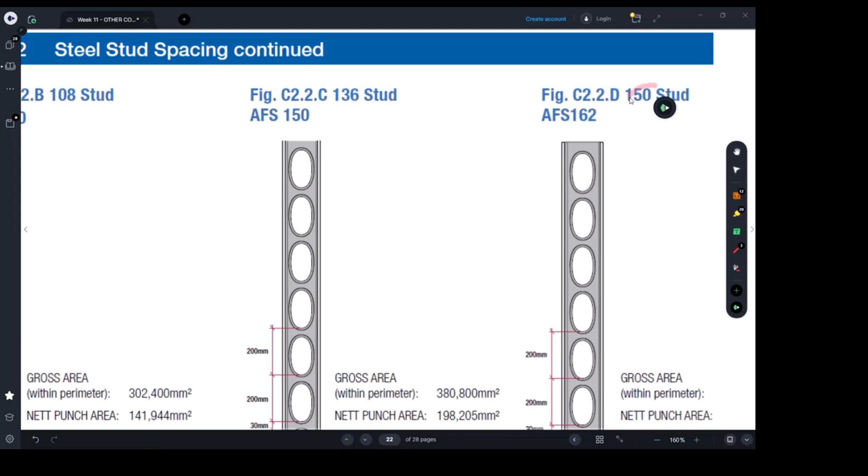Yes, it can be used, that's all usable. So imagine a retaining wall—definitely you need a quite thick wall, up to 200 thick, and the reinforcement may need to be on both sides, not only one side or the middle. If you have a wall carrying lightweight load, not a lot, you may end up using 150 thick or even 120 thick, with reinforcement only in the middle. But for heavy duty walls, the reinforcement may be placed on both sides, the soil side and the basement side—so you have to carefully read the engineering drawings, especially for 200 thick walls.

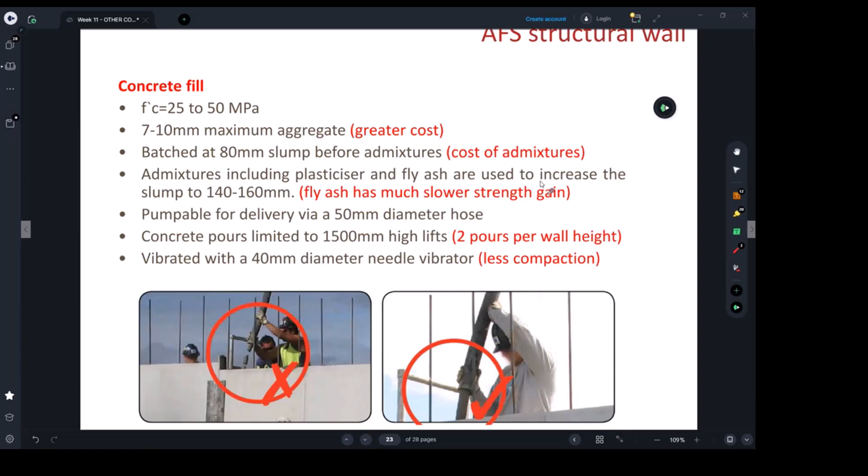Yes, there are some arrangements to consider when contractors support this. Definitely when you're going to have contractors to construct such walls, they're going to be having such experience. You don't need to use people who never used it before. The challenge from friends, construction engineers I know, is they sometimes say I want to use this type, but they don't bring the correct contractors. They bring contractors who have experience building normal in situ concrete walls, or people who usually have experience pouring columns or slabs.

No, there are some different techniques that have to be followed, which people can always read from the supplier. So all these notes really come from the suppliers, which is the AFS manufacturer. They give recommendations in terms of pouring the concrete. For example, there is a maximum height when you concrete pour, limited to 1500 height lift, so you cannot pour it like that. Imagine you just started pouring here, you cannot throw the concrete from this height. You have to impose the pipe into the wall more, so you have to go about 1.5 meters high. You want to have that self-compaction.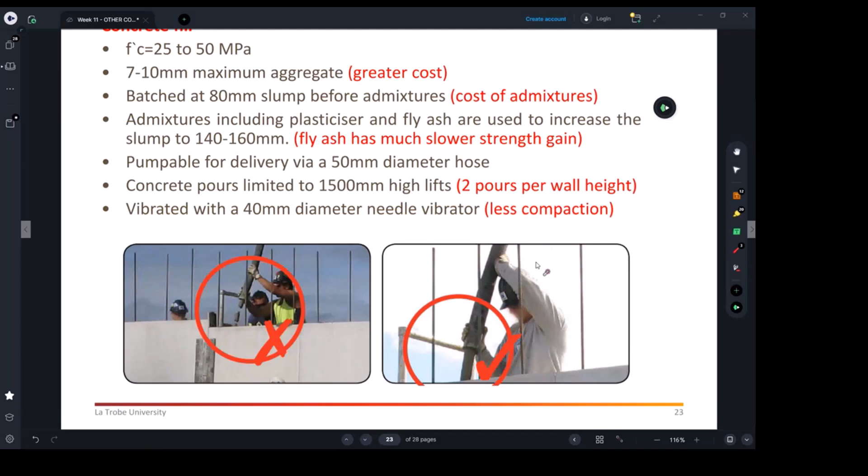So there are recommendations provided by AFS to make sure the compaction arrangement will be done appropriately. There's also admixture recommendations, again, to make sure the aggregates will be small enough and possible to get all the concrete within the small gaps and spacings between the channels and the bars, or between the bars themselves.

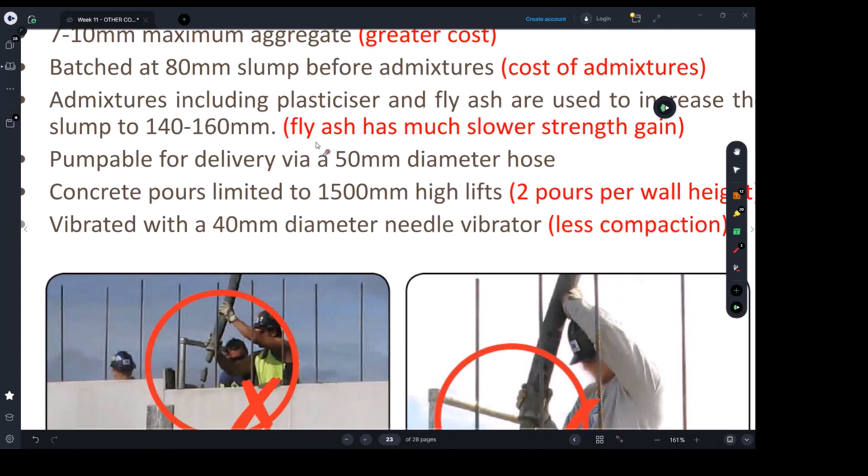Slump test for the concrete mix to be within this range is quite high, 150. So the concrete is quite loose, and usually, you know, with the use of fly ash. Fly ash is included within the mix of concrete just to have a better rating of green concrete. Fly ash is a recycled product that people nowadays can use in the mix of concrete, which will end up resulting in a highly workable concrete in terms of its slump. Now, when we add fly ash, it will reduce the capacity, but the capacity, as you can see here, can range between 25 to 50.

So, as I said, we're not heavily worried about crack control. We need it to be within the adequate limits that will give you the strength. But in terms of appearance, this is already achieved by having this finish, by having the architectural finish already concealing the wall permanently. So it's a permanent formwork, that will look after the architectural serviceability of the wall. If it was a normal wall, and in case it is a retaining wall, it will give you that waterproofing requirement.

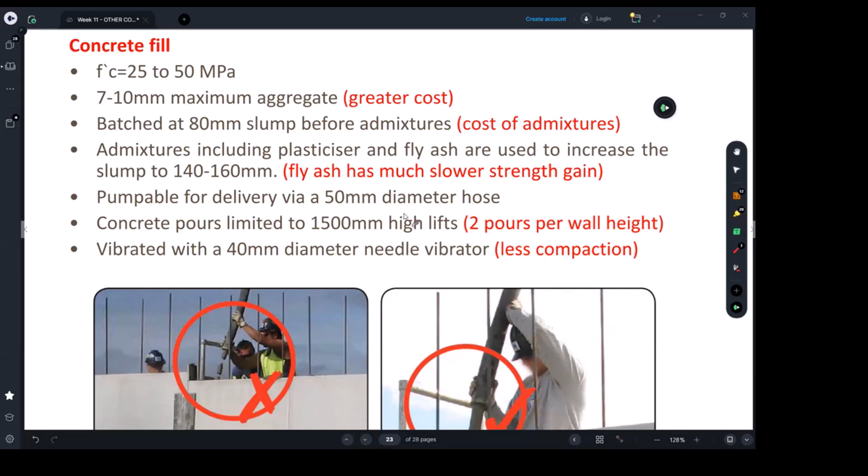Okay, and there is just some ideas about the size of the piping tube, which is to ensure it can work for you. You don't need to have tools which cannot fit the available size. And just to let you know, like what I was talking to you about, the height of pouring the concrete, this also applies for a block wall. I remember inspecting one of the block walls - I've actually got the picture somewhere. There's a 140 thick block wall.

After they done all the construction process, next day there was a test done, and they found - so this is your elevation for the wall, a block wall, that was the elevation.

And they found a big area with no concrete. You can see even at the end of the day after they pour it - what they do is pour the concrete from the top. It was only a 140 thick block wall, so it needed really small pipes, and it needed to be poured from a lower level. But we think this was not all done, and there was a big part here without any concrete.

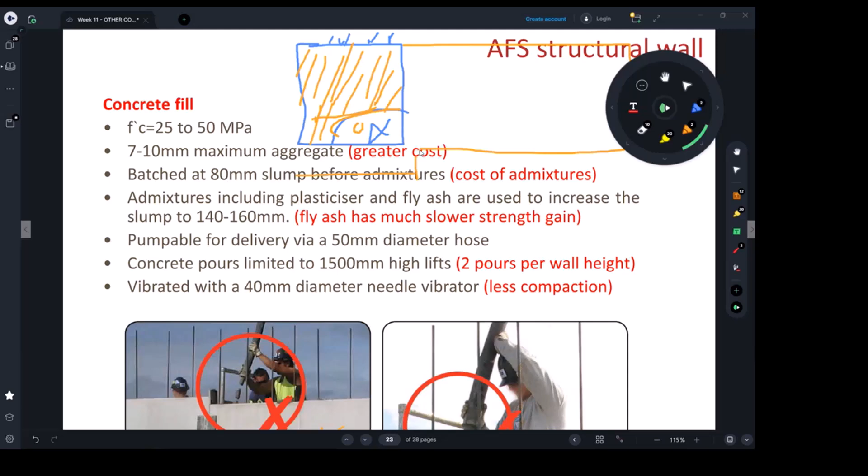So it is very costly to not have the right people doing this. Pouring concrete isn't just skipping something and throwing it in - you have to make sure it's well vibrated and well compacted as well. So that's exactly the same point - whatever applies here applies to any other types of walls.

I know in this subject we didn't have a topic talking about block walls specifically. If you want to see, maybe I can show you. Locally it is used, but mostly in residential constructions - block wall, let's say reinforced, let's say 140 thick. This is kind of one unit of a block wall, but I just want to show you how it's built.

Here we go, something like this - you see them around. This goes from the smallest thickness, it can be 140 like you see here, but it goes up to 290 - can be as wide as 290. One of the issues with these block walls is you can see here, they need to fill all those voids, and usually the mistakes or challenges is making sure it's poured very well.

That's where you need to discharge the concrete at lower heights, making sure the tubes are positioned about mid-height of the wall. Like the example I was talking about, there are cases where after pouring the concrete, if people haven't done correct compaction and didn't have correct workable slump concrete, you may end up having a lot of gaps within the wall, which can be straight away rejected, and you just need to demolish and redo it.

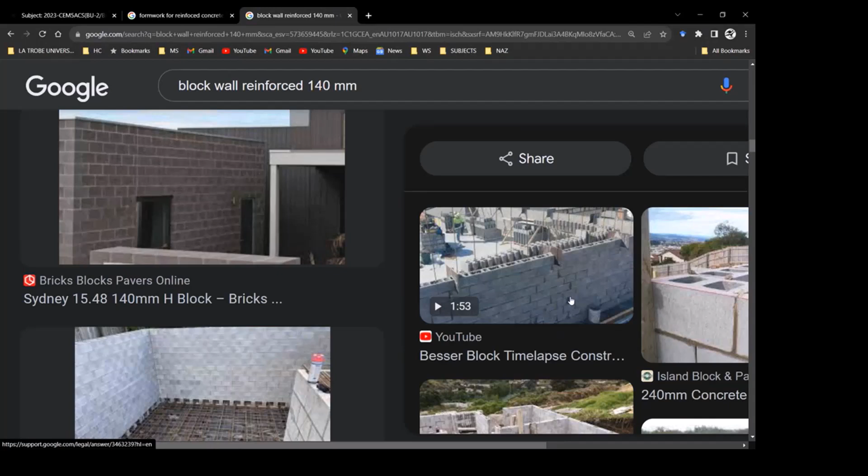Yeah, I know we did not really have a topic talking about this type of wall, but it's mostly used for residential constructions.

Especially talking about the other brand name, Dincel - the Dincel product as well. It's a different wall system, Dincel, Dincel. So maybe we've got a few minutes to go through the Dincel wall.

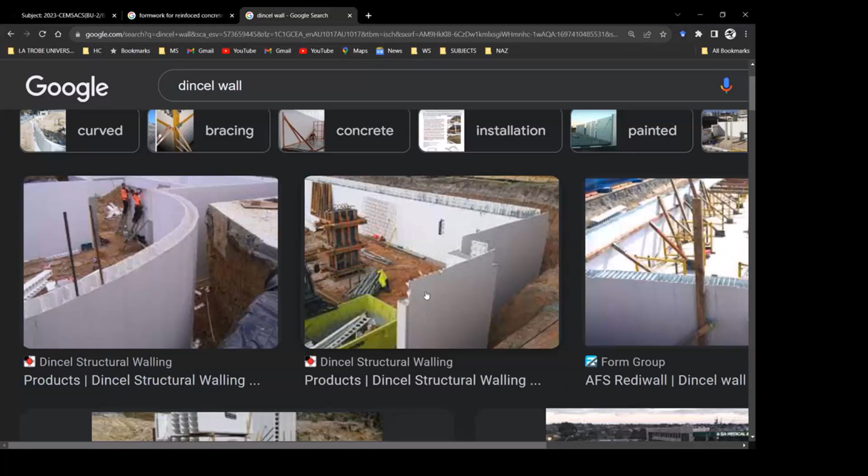Just images - now Dincel is kind of, if you see its formwork, it's even lighter. You know those channels here? It's actually a polymer based product, but it's high duty, so it's still doing the job. And as I said, it's well used as well.

And it can give you all that waterproofing for retaining walls - I think here it's a retaining wall. It's not anymore the ribs inside them - I'm not sure if there's a better, closer picture. There is no steel channels, it is mostly just a polymer-based product - the entire unit is a polymer-based product.

Those horizontal elements are not steel, so it's very lightweight in terms of construction and very fast to build. It's like cardboard - you just go and place them, and then you put your steel.

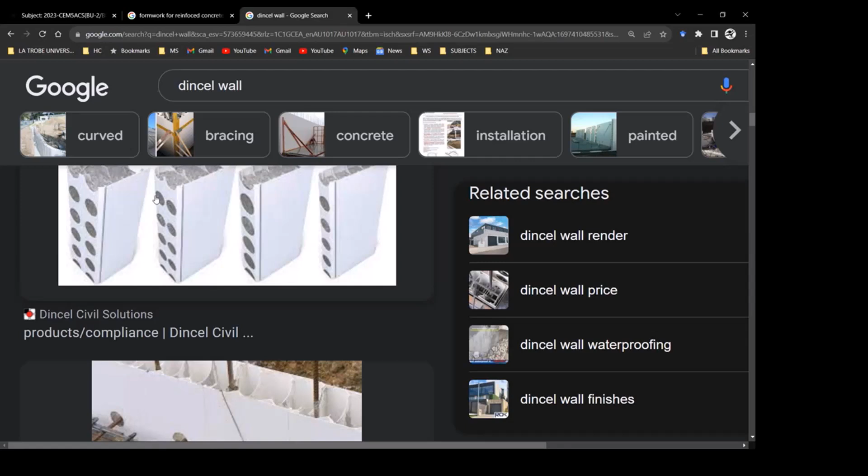As I said, you see here we've got 2 holes. We use this for retaining walls because we can place the bars in the right position, and we can put them on both sides. You can see the level of reinforcement and placing the reinforcement - that's at the corner, what we have to do there as well.

Yeah, that's just the pouring process. So this is, as I said, 2 famous brand names, Dincel Wall, and you can see how lightweight it is. That's just one unit - they place it next to each other, and then it's ready.

There are a few propping lines that may be required, but few. You can see the level of propping, and you need it only from one side, by the way - not both sides, if deemed to be required.

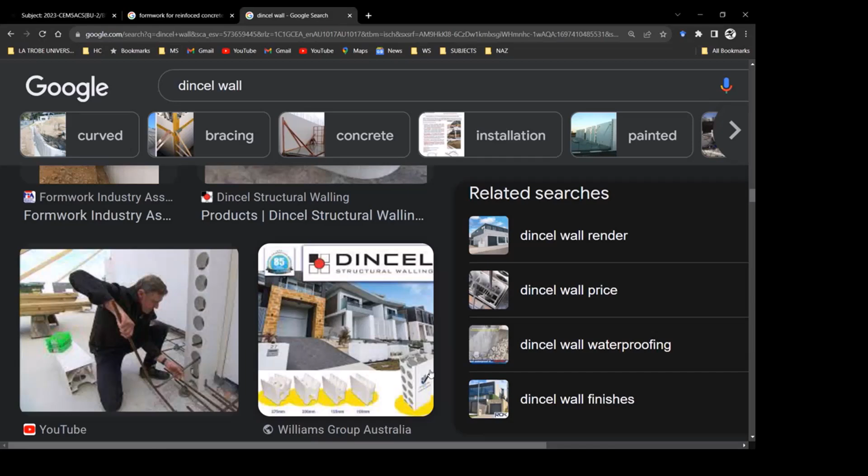Now, what I was talking to you about - there's usually research done by Dincel which says you can omit all the crack control needs. I don't want to take you through a lot of detailed engineering thoughts here, but Dincel, for example, helps engineers eliminate all crack control reinforcement to some stage.

AFS still asks for some limited quantity of steel, but things may change depending on how they want to take things.

But at the end of the day, this is all documented by the structural engineer, who will give you engineering drawings like what I shared with you for the other topics. So there will be engineering drawings to tell you the quantity of steel, and it just needs to be built as per. In terms of cost, you will save steel, save formwork time, and save propping time significantly.

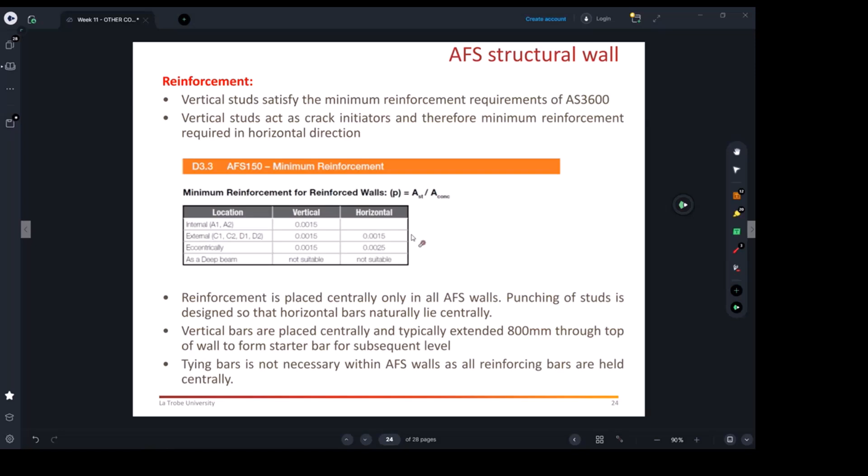Some pictures similar to the ones I showed you - there are shop drawings, really built shop drawings, something similar to the shop drawings for the precast panels which I talked to you carefully about.

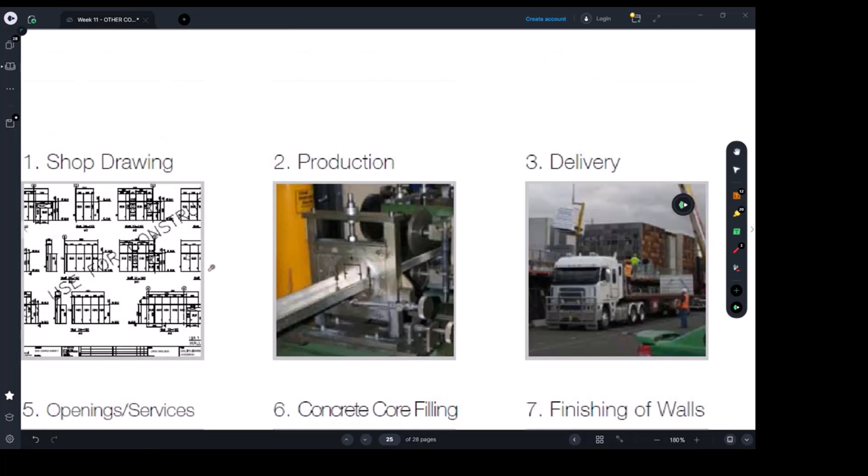Same process - you'll have engineering drawings which specify the main steel components and framing components for the wall. Then, if it's a large project built with a lot of such walls, you can request shop drawings which give you detailed sizing. If you've got few walls, you can work this out with the engineer straight away.

This is provided by the supplier, and I think some of them keep updating them. Maybe, as I said, a few years ago AFS were asking for crack control reinforcement, but I think nowadays they have different arrangements where they don't want additional reinforcement. The construction process and all those detailing, coring, core filling - they allow for making holes within the walls.

All is actually provided on the websites from AFS, which you can watch - but don't expect in the exam that we're going to ask you to answer information provided within those videos.

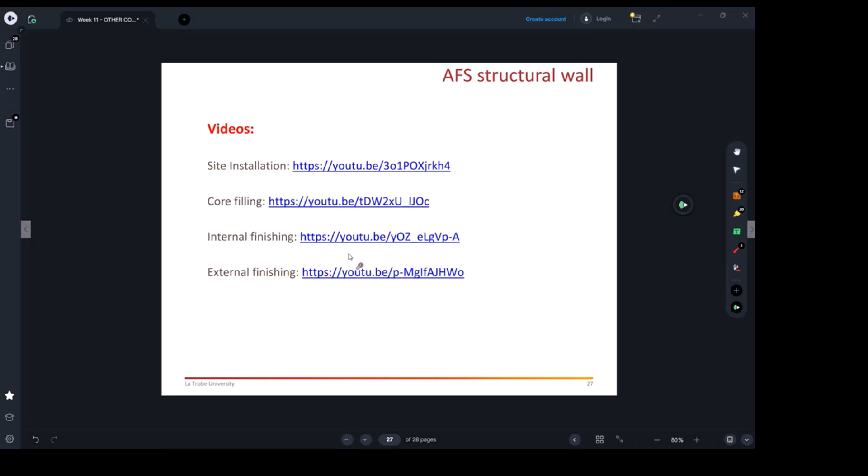It's good to keep them in your library in case you want to discuss an option or talk about it - like nowadays even homeowners who want some concrete within their properties would go with these options. So it's good to know about it.

But the key advantages I talked to you about are the fast construction - what we discussed earlier - and saving all that propping cost and propping time. You can build that boundary, it can give you the waterproofing, and it can help you control the cracks of the wall. So these are the 3 other advanced systems I wanted to share with you before the end of the topics.